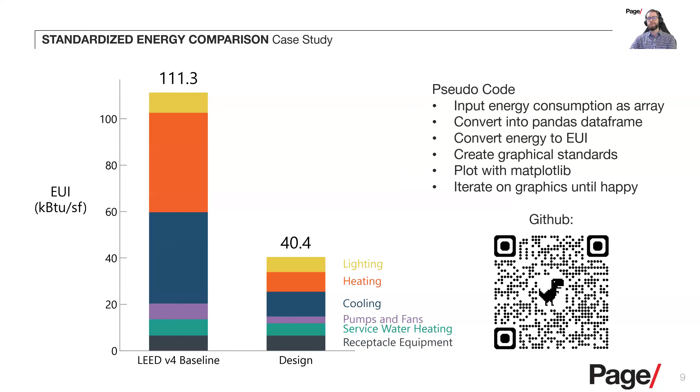Each of these examples here also has a pseudocode, which is just a text representation of how the code is structured and what it's doing. So I won't explain the code each time, but it would allow you to come back to these notes, look at the GitHub and say, I think I understand what he's doing. Maybe I can start breaking it down.

The next example here is for AIA 2030 processing. We have a massive spreadsheet of all of our projects across the firm where we're tracking many, many metrics. That spreadsheet is not easily uploadable to AIA DDx. And so instead, I use Python to simplify our massive spreadsheet into a batch upload file, which requires a lot of filtering and correcting the data. But now that I have this Python code, I can use it every year to just filter and clean up the data and submit it online without it being this really big cleanup effort in Excel year over year that is not repeatable.

Additionally, one of the most challenging things when it comes to exporting and looking at the data for AIA 2030 is that everything is area weighted. And I just wanted to provide this little function here that allows you to calculate the results of your AIA 2030 data if it's area weighted using an aggregate function in pandas. So if you import everything to pandas, you can aggregate and use this. So if you want to filter by office or market sector, this will allow you to filter by different denominators.

The next example I want to share with you all today is using the OpenStudio SDK. And a word of warning is if you're new to Python, I wouldn't focus on SDKs right away. This includes IES VE, OpenStudio, Honeybee. SDKs in some ways are their own language because each of them has a little bit of a different structure. You've got to learn how to read SDK documentation. But once you've become comfortable in Python, connecting it to the tools that you know and love, like OpenStudio, IES VE, Honeybee, can become extremely powerful and give you unlimited potential.

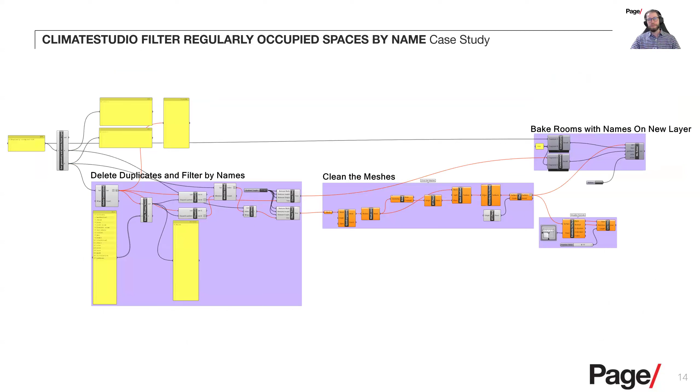The next one is a combination of Grasshopper and Python. Climate Studio is one of our preferred packages for looking at daylight calculations. And when you export a Revit model into Rhino for Climate Studio analysis, you get all the occupied spaces. And we often want to filter that down to the regularly occupied spaces. So what we did is Mo and our team wrote a custom Python script as a component where you not only can get the objects by name.

So if you give it a layer, it will get all the objects on that layer as well as the names. You can then feed it a text string that says, if the name of this room contains bathroom or electrical or mechanical, it will remove it from the list and produce a new list that allows you to filter out those common names that you know are not regularly occupied, like corridors. This allows us to save a lot of time, especially as we re-import or export the model at various stages. We can just run it through the script, get our new regularly occupied spaces, and run our new LEED daylight calculation.

And it was a really great experience where we got all various levels of sleep, but we all felt really accomplished by the amount of work that went into it and the progress and development we saw in just 24 hours. And it was really a preliminary step to something that Jake and I have been thinking about creating for many, many years that shows that this is very much doable.

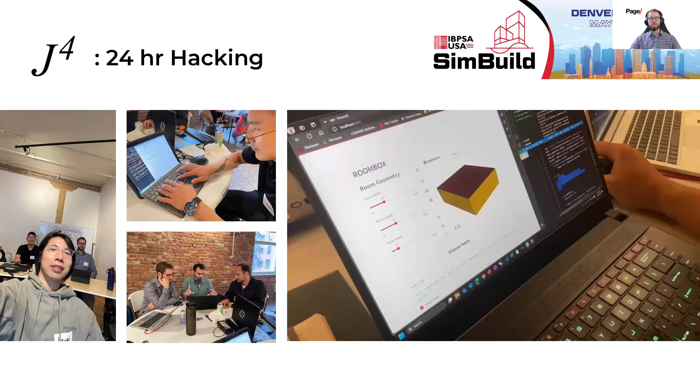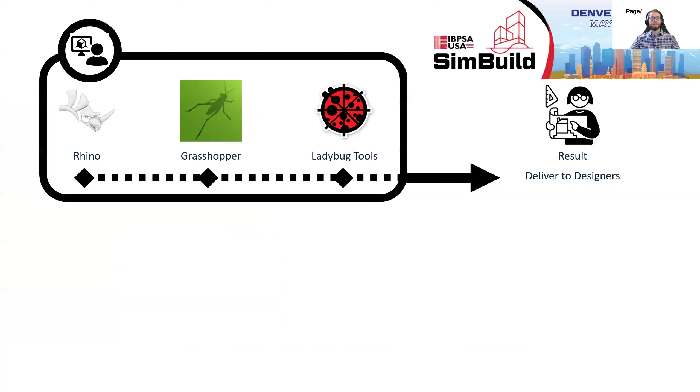So typically our conventional process today is a designer comes to us, says, hey, we want to design a building with the ideal window to wall ratio, the right shading elements. How do we do this? And we as analysts will go and use Rhino and Grasshopper and Ladybug tools to run the analysis. We provide the results to the designer.

We asked ourselves, could we create an easy to use tool that's a web-based platform where a designer could go and iterate themselves to find the best answer? And that's where Roombox came from. Roombox uses a combination of GitHub, mostly to host the files, Streamlit to create the web interface and make it accessible by people within our network, as well as using Pollination to run much of the simulations, set up the models, et cetera.

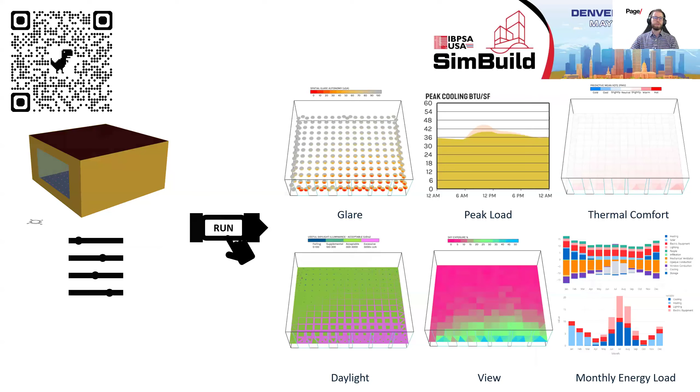The long-term goal is that we could create a parametric box. They can edit the parameters, click run, and get a variety of simulation options via various building performance analyses. When we did this, we only got to the daylight step of the task in the 24 hours, but even that was still really great because we were able to take this interface, control it dynamically, change the box size, add shading elements, and then even batch upload files.

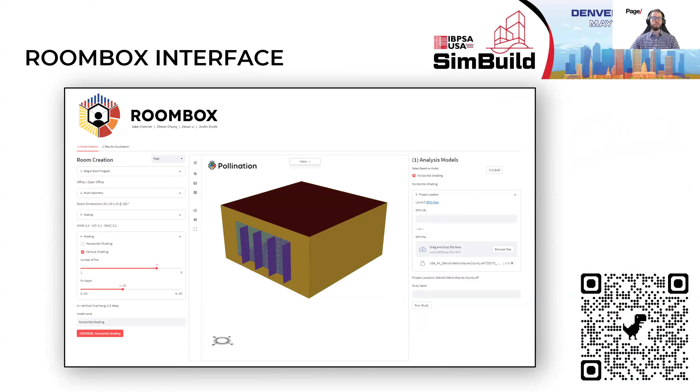If they wanted to create 3 or 25 different simulations, they could do so all in a very succinct way, click run, and it would all go to the Pollination cloud. And then you could download individual results to look at the combination. Another word of warning about this, I would recommend learning Python before learning the Honeybee Ladybug SDK.

This 24-hour hackathon turned into 523 lines of code. But the most complicated part was learning not only the Ladybug core tool library, but also the Pollination core tool library, which is constantly in development and changing. We've been talking with Mustafa about getting some new documentation and other things to help make that process more streamlined. But overall, the word to the wise is these were all the different import functions of all the different packages that we had to import, from Pollination to IO to Streamlit to Honeybee Radiance. It became very technical very quickly.

So feel free to look at this code, but also recognize that it can be very overwhelming as you're starting out to dive this deep. And so that's all for me. I'll hand it over to Jake.

Thanks, Justin. That was a great project to collaborate on. Screen here. And we'll kick that off. All right.

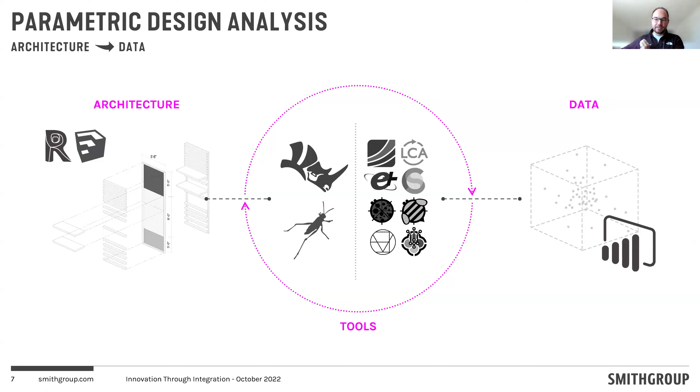So what that process looks like for those unfamiliar with this is really breaking down that design problem. So for this example, we were doing a facade optimization, and we start off with glazing options. So do we have a ribbon window? Do we have like vertical punched windows? And then pairing that with shading parameters. So we could say we have no shade, we have one overhang and a few frits. We have three, four overhangs, et cetera, et cetera. So you build up all your options, and then you start pairing those.

And what this ended up being was, I don't know how to get this screen out of here. Okay, I don't know if that's like in front of everybody else. Okay, there we go. Jake, we just see the slide. You're good. Oh, okay, cool.

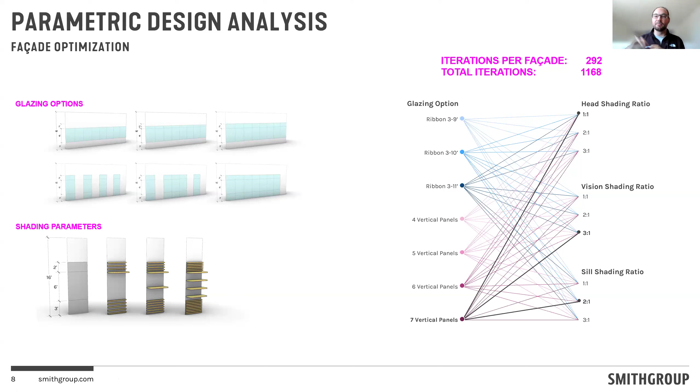Sorry. So the total iterations of all these options stack up, and it's almost 1,200 iterations. It's 292 per facade, and that really starts to become a lot. But when you can leverage the cloud and whatnot, deploy those into cloud batch recipes, visualization sort of becomes a little bit more cumbersome. So what we did here is we did the large batch processing, and what I did was took all the outputs there, and I had a CSV file. Typically, I'd throw that in Design Explorer, but I started dabbling with Power BI, visualizing with custom visualizations there.

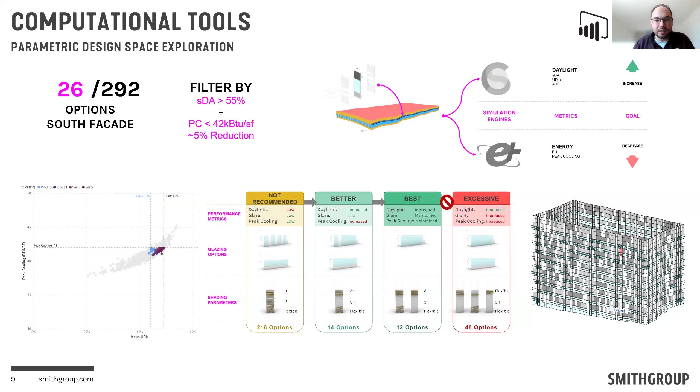And then we're bucketing these in like a not recommended bucket, a somewhat better bucket, the best bucket, like we highly recommend these 12 options, all the way up until like an excessive bucket, like they're letting too much glare in, the peak cooling's increasing, et cetera. So the design teams really liked that because we gave them options, and they felt like they still have agency over the design. For this particular facade, running all these simulations and having all these different options meant we could deploy those across the facade in a randomized pattern to create this really textural effect for the otherwise pretty monotonous facade. So it was a collaboration between us building performance analysts and the architecture team. And that's really where we love to be in that process.

The next iteration I'm going to talk about in my coding journey. So that's kind of like the Grasshopper, Rhino world of building performance. But what are we doing after that? So this is a climate action plan. I use Python, Pandas, and Power BI for this. The goal for this tool, we'll call it, is an interactive visualization of campus energy demands, the impact of ECMs on those EUIs, and the carbon projections by year.

So we took a bunch of inputs here. We had EUIs for 900 plus buildings. We worked with our mechanical engineers to figure out what ECMs are manageable, what the impacts might be on those various buildings. There's a few proposed solar installations, so we rolled that into it. We're also looking at climate forecasts. So we're looking at cooling degree day changes and heating degree day changes over time, forecasting that out. And then we're also looking at grid emissions forecasts using Cambium forecasts.

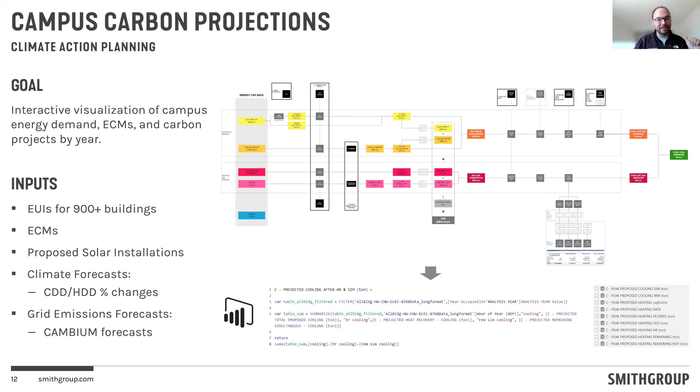So I use these as leverage to do QA/QC, but also to keep my mental sanity of, okay, this app is growing and growing. There's a lot of different calculations, et cetera. So it's a way to manage all that. So what we end up with is a dashboard similar to this. And I'm going to kind of scroll through this video rapidly.

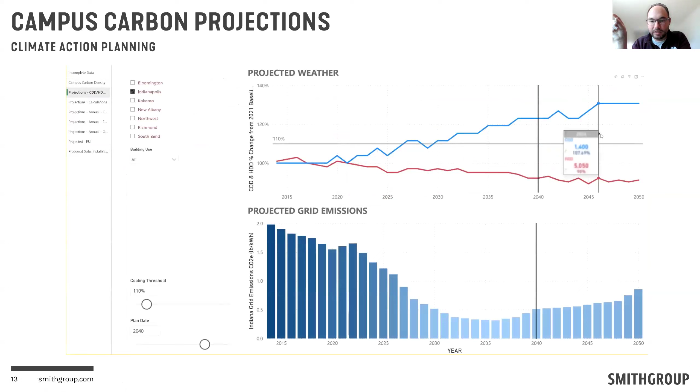We have campus carbon density, so highlighting different buildings on campus. We're looking at the projected weather data, the projected grid emissions, and then this is the total campus. You can filter by campus, you can filter by building use. We can look at different ECM measures. We rolled in cost per square foot as well, so we're getting a rough order of magnitude on that.

We have a local solar installation here, so you could say what percentage of that load at what year do we want to install solar capacity. There's district energy system upgrades. So a lot of different ECM measures that we worked with our mechanical engineering team to make sense of what to propose on this specific project.

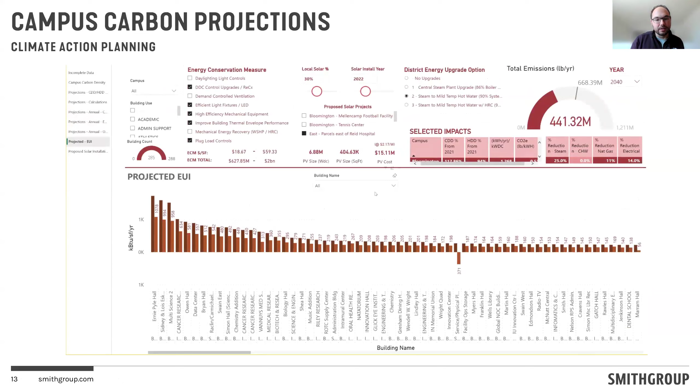So we're looking at carbon projections, which is what you just saw, projected energy, and then also operating costs as well. And then you can also break it down by projected EUI per building to see what those projections are going to look like. So the climate action plan team really loved this because it allowed them to create these different scenarios in real time to look at how to decarb their entire portfolio.

So it's a dynamic tool. It's really fun to get in there and kind of see, okay, what about this scenario? What about this scenario, et cetera. So that was the first version of that I made. The second version we're calling Campus Carbon Planner. And this is V1, you'll see V2 in a little bit, but I was using Python to clean the data, Pandas to kind of structure that data, and then again, Power BI for the visualization.

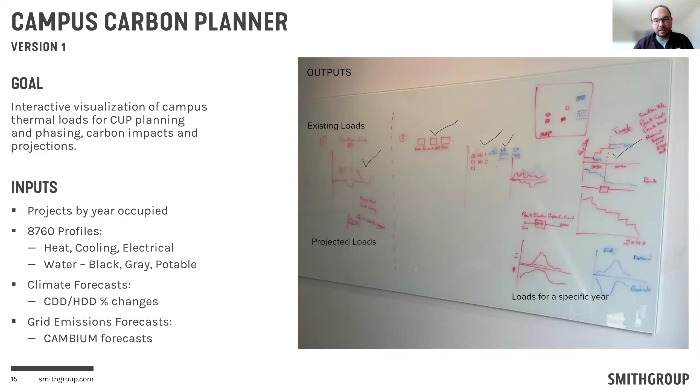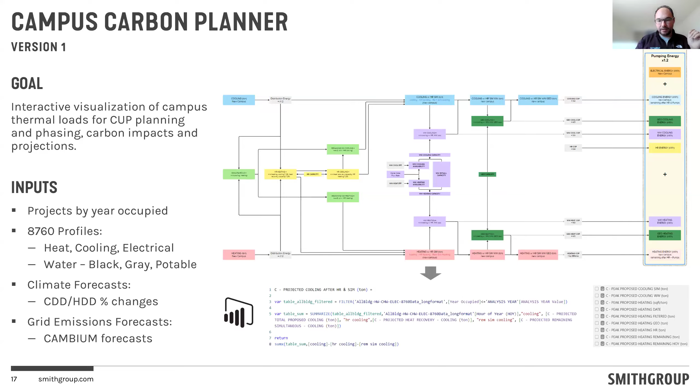And again, I turn that into these flowchart diagrams so that I can QA/QC the calculations, so that I can make sure that my measures, remember the DAX measures here, are being calculated appropriately. And then I go through and build out all the single measures, and they stack up to create the tool such as you see here.

So again, I have a quick little video. So this actually has a project planner. There's many different projects on this campus that we're working with. So that allows them to jump in and create these different scenarios and say, okay, building X, Y, and Z is going to come online at this year.

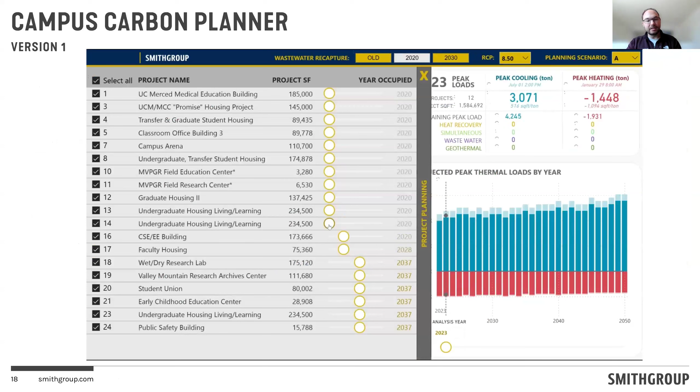Then the next phase is going to get built out, and the next phase after that is going to get built out. And then in real time, we're able to see these projections of peak thermal load by year. We're able to see the hourly thermal load breakdown. And then also we're able to apply different strategies. So heat recovery, wastewater recovery, geothermal. We're also able to filter out where we're recapturing wastewater from.

Is it the new campus? Is it the old campus? Is it all the above? Again, we have the climate data projections. So 4.5 and 8.5 scenarios is what we included here. Et cetera, et cetera. So we're giving real-time metrics as you're moving through these different scenarios, and you're able to map out what makes sense, and then you're able to look at phasing, et cetera.

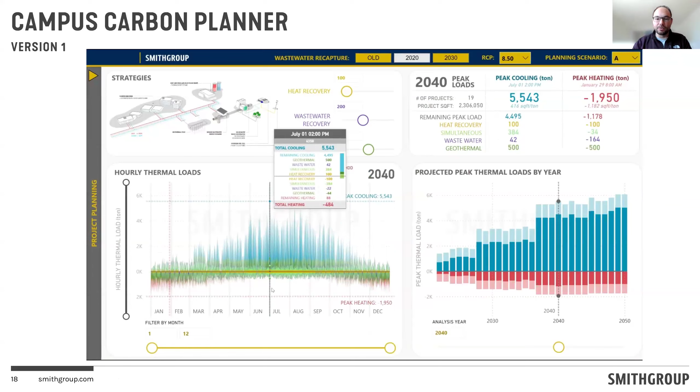So the tool is really helpful. The client loved it. They love seeing us interact with it in real time. We are actually able to share it with them, let them interact with it in real time, because we understand that campus planning is dynamic. It's always changing. So yeah, we wanted to build a tool that responds to that. So that's that. Moving on to the next one.

The Carbon app is a full Python web-based app, similar to what we did with Roombox. So Python, Pandas, and Streamlit. The goal of this was to create an interactive visual of different climate zones. So I took a map here. I intersected the climate zones across the United States here with the balancing authorities. So like the grid using WattTime data.

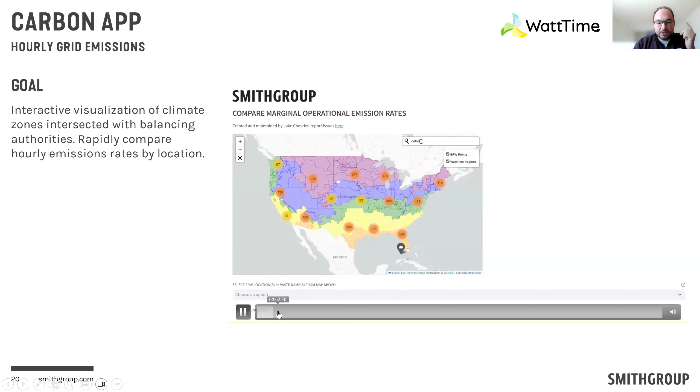You're able to search for a location here. So for instance, I always use Detroit. I grew up outside of Detroit. And what this does in real time, you're able to search for that location and pull up and get your grid mix here. So this is an annual chart of the grid mix at any given time across the year. That's all good. But then when you start comparing that, the legends don't match, right? So right now I'm at 1,300 to 1,500.

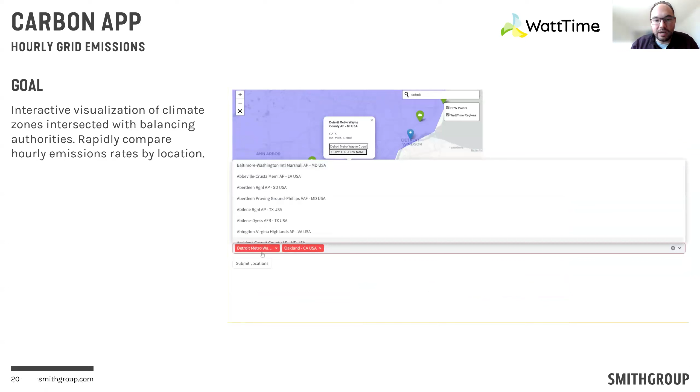And so what I built out is you're able to actually input a different location as well, and then have a comparison graph pop up automatically with the legends normalized, so that if you're looking at two different regions, you can see Michigan goes quite red when compared to where I live now, which is Oakland, California, you can see we have a lot of solar here. So this tool is a quick interactive visualization of the different grid mixes.

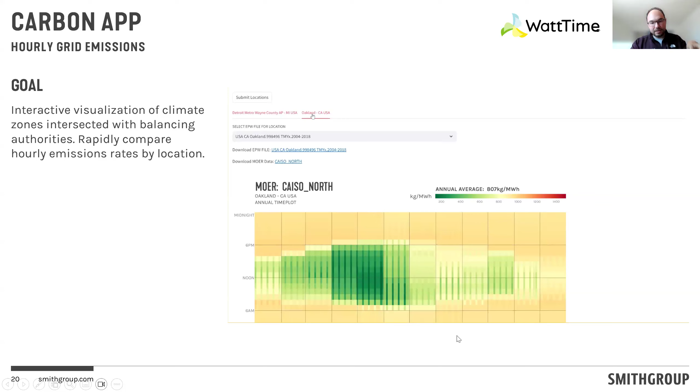And our teams use this all the time. They jump in here all the time, and it's web-based and it's really easy to access. That's why I personally love the web-based tools. We don't have to fire up a whole environment, Python, Jupyter Notebook, all that kind of stuff. Web-based, you can hand over the URL and move on from there. So that's where I'm going with the Campus Carbon Planner V2.

So what we're going to see here is a combination. I'm using Figma to do the layouts. I'm using Python to build it out. I switched over from Pandas to Polars, which is supposedly a faster library. I've seen better performance. It's the same kind of concept. You're using data tables, et cetera. And then I'm using this framework called NiceGUI. I don't know how you're supposed to say it, but that's allowing me to create a much more robust interface, as you see here. So these are my Figma boards.

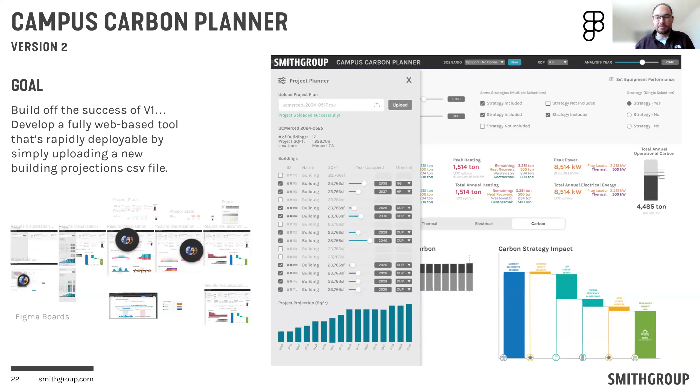Our goal here is to really just build off the success of the V1. So we're trying to develop a fully web-based tool that's rapidly deployable by simply uploading a new building projections CSV. So our dream is to have an upload section, and then that carries through and builds out this whole interface with the sliders and all the selections that you see here. So this is my Figma prototype. And then this is a somewhat crude version. It's still in progress, but it's actually manifesting into a pretty robust web-based interface.

And this is all Python-based. So I'm using Figma to kind of lay it out. Like I said, kind of convert those early prototypes into something visual and mapping out what inputs I need, how we're going to structure that. And then I'm using Python and NiceGUI to build out that interface. And as you can see here, the charts are made with Plotly. I probably should put that logo up there as well. But this allows you to interact with this data in real time, its projections.

So we're looking forward to deploying this on a lot more campuses in real time. And this runs a lot faster than the Power BI version.

So all that said, my main takeaways, and I list a few resources here that I've looked at over the years, is don't rush it. You're not going to be an expert right away. It's going to take time. I keep feeling like I want to push things forward, and I just need to be patient with myself and realistic with my goals, that it takes time to learn this stuff.

Don't overthink it. Just kind of get started. There's so many different resources. There's so many different ways to go. I would say just don't overthink it. I do recommend Python. I think it's a pretty easy language to pick up. And I'm listing some of those resources here that I went through.

So I actually did a Udacity course a couple of years ago. I've looked at a Udemy course. I've tried a Coursera course. I've tried YouTube courses. I tried Free Code Camp. I haven't tried the Odin Project, but I looked at it. I heard good things about it. And then again, I leverage those large language models all the time, ChatGPT, GitHub Copilot, and all that.

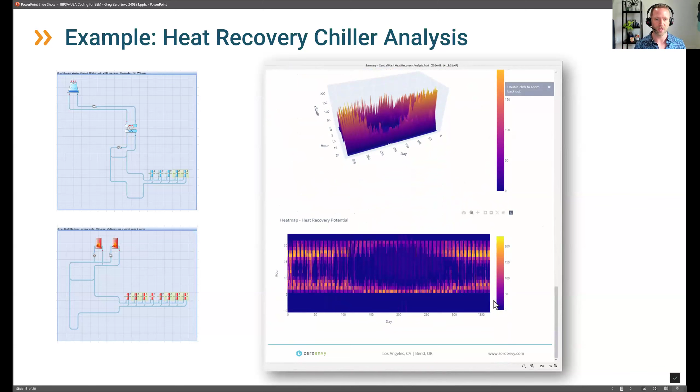All of these are Plotly indicators or plots. They're dynamic. It breaks things down month by month, allows some user interaction. And then this version, it's just a simple HTML file that will open within VE's content manager, which is kind of like a little web browser where you can open files within the software. Eventually this one will be web hosted, but right now it's just within the tool for our projects.

And then the BEM toolbox is essentially like, we got into Python, hit the ground running. We're really excited about what we were able to get out and start building. And so we had these cool tools that were starting to come together, and we wanted to do two things. We wanted to share the tools with other people because we're like, okay, this is a game changer for us. I'm sure lots of other energy modelers using VE or other tools would really benefit from these.

So we wanted to share them with other modelers, but also we wanted to take advantage of the modern form of data reporting, which isn't Excel and PDF. It's really dynamic and shareable. So we wanted a web tool where we could send a client a link and they could click on it and open up that report and start playing around with things. So we built this platform to do that. It's called the BEM Toolbox.

We got somebody to help with the architecture and setup of the site itself. Now Sabrina's been running with improving and maintaining it, so we can do that internally at this point. It's free to create an account, sign up. You have access to these tools. This is the workflow once you get in. This is showing the instructions, showing a link. You can click on that.

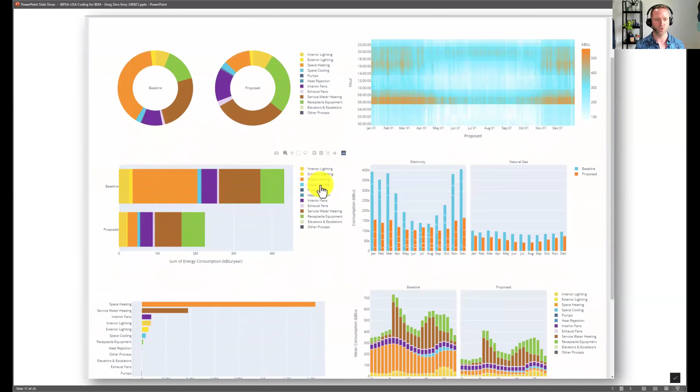It'll take you to a free Python script on IES's content store. So you can download that, install it within VE. I'll show you that in a second. But here's the HVAC summary spreadsheet report I showed you before, and how you can have access to that one as well. And then here's an example of one of the dashboard-like analytical tools that is available through there. So this is the second version of the one I mentioned earlier.

And so again, everybody here has been a fan of Plotly. We are as well, because it's a Python library that creates plots that are based in JavaScript and things like that, that are just more dynamic and interactive. So you just get that out of the box, and you can make them look really nice.

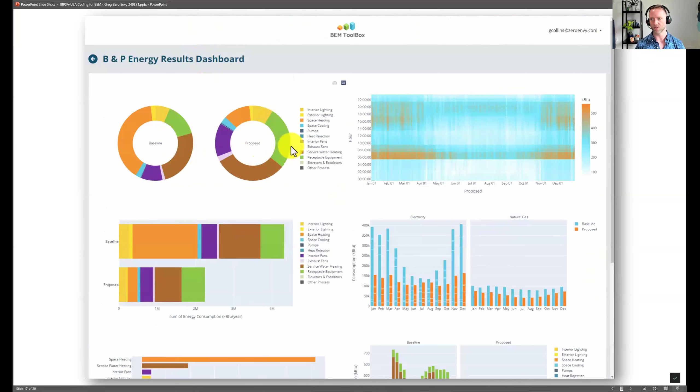The dashboards too, at the bottom, you could see you could create a public link, click a button, it copies the URL to your clipboard, drop that in an email, send it to your client or design team partner, and then they can open a version of this that doesn't require an account to be created. So they won't be able to go back and see other tools. They just get the one dashboard view.

And yeah, people have been a fan of that so far, and it's been more fun to do this and easier to generate than creating the old version, and then more value on the other side too. So it's a win-win.

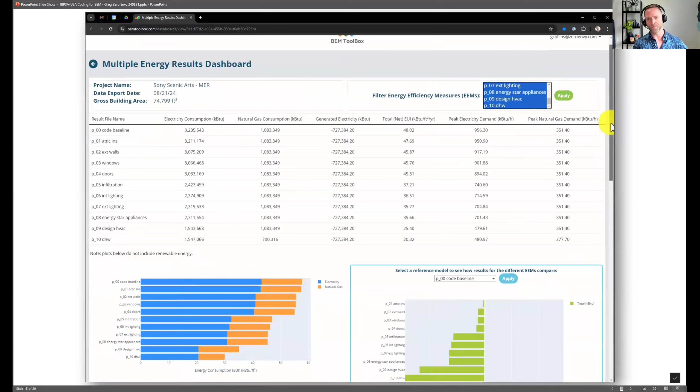So the IES content store scripts that I mentioned, once you download them, they will install these navigators within the VE Python scripts navigator. So this allows you to enter your BEM toolbox credentials. It'll get gross area, square footage, or other metrics as well from your project, and give you the ability to tweak that if you want to exclude parking garage area, something like that. And then it will send the data to the BEM toolbox, open the dashboard in a browser directly, and you can just get in and start playing around with that.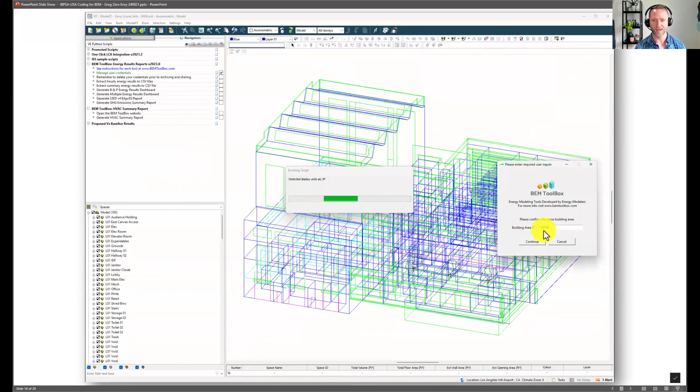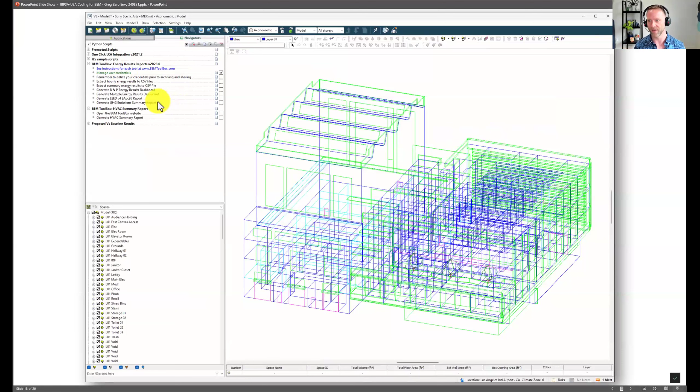That dashboard we call the multiple energy results dashboard. So basically it's focused on if you're not in just a baseline and proposed compliance scenario and you want to compare 3 or more sets of results. It might not do 1,000 very well, but doing 5, 10, 20, it's pretty good. And then you can change the reference model that you're comparing against. You can pick different end use categories to drill down and get different graphics there. So adding a little bit more customization, user interaction into this dashboard.

And it's a first version of this that we're working on, kind of advancing, but hourly carbon emissions are important to start understanding and looking at, but it's a lot of data, hard to calculate. So we wanted to make that easier and more accessible. There's also a LEED pilot credit, alternative energy metrics pilot credit, that will create the workbook for you that you can submit to LEED to hopefully get a few more points under V4 prior to the 2024 update.